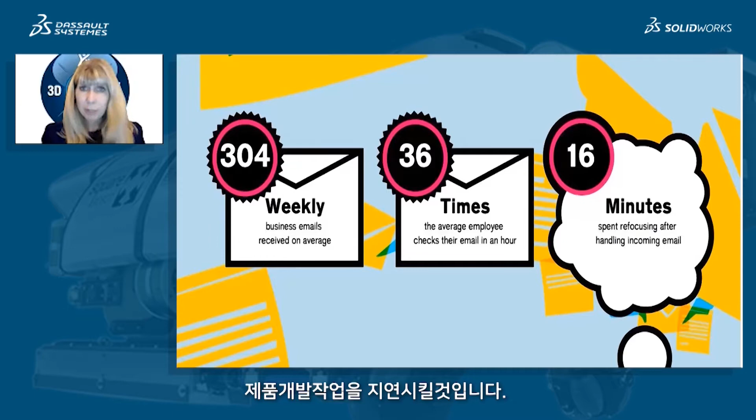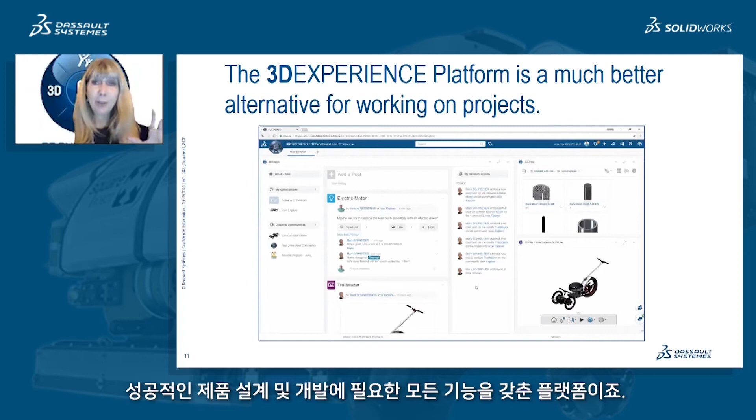It's very disruptive, and that's why we like to talk about the 3DExperience platform. It's a much better alternative for working on your projects. It's all inclusive—everything is in one place. Here you can work on SOLIDWORKS, collaborate with other people, get notifications, and see tasks you need to work on. It's really a one-stop shop for everything you need to be successful in product design and product development.

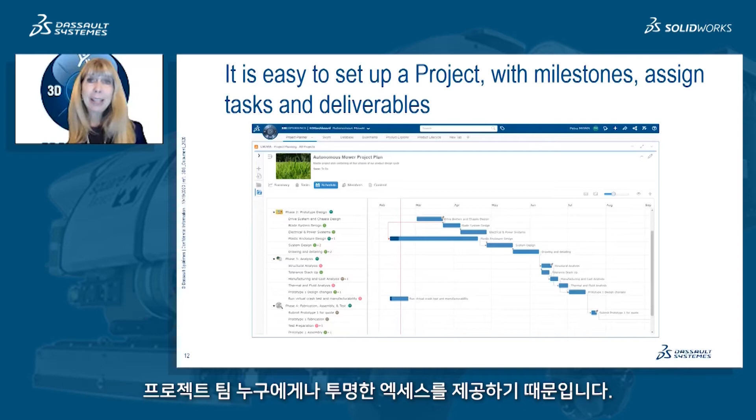You will also see that it's very simple for you to set up a project where you have milestones, tasks, and deliverables. There is a role called project planner where you simply go in and say, this is the project. You set up the different milestones along the way, you assign tasks, and it will help you keep track of everything. At any point in time, people can come in and check the timeline to see what's been accomplished and where you are, so there's transparent access for anybody on the project development team.

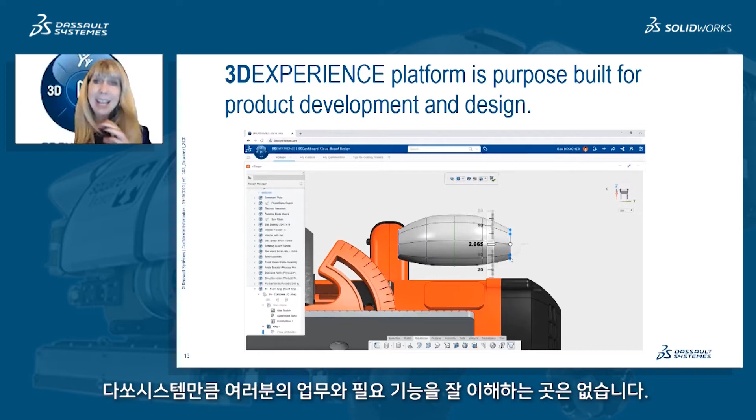The great thing about the 3D Experience platform is it was intentionally built for product development and design by the people who bring you SOLIDWORKS. They understand what you do. No one understands what you do like they do.

It's also very easy to create dashboards with very powerful metrics. We do it all the time at Dassault Systemes. One of the things I love is that we all use the 3D Experience platform, every single employee. We log on in the morning, we see if we have any notifications, we see if we have any tasks that we need to do. It's a great system for helping us collaborate and be very successful in projects.

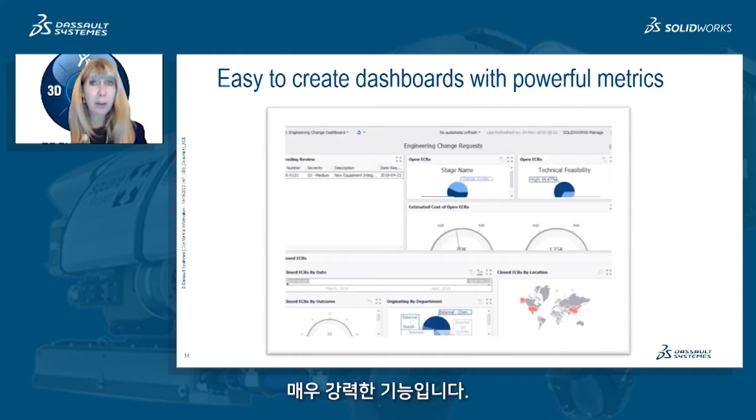Here's an example of where you could have a dashboard that shows you if you had any engineering change requests. You could grab all types of information from the internet, like sales, for example, and have it calculate where your sales are at any given time. It has the ability to bring in Excel spreadsheets and keep dynamic information up to date so that anybody can take a look at metrics and where you are at any point in the project life cycle. It's very powerful. You don't have to ask anybody else for the information. You can go look for yourself.

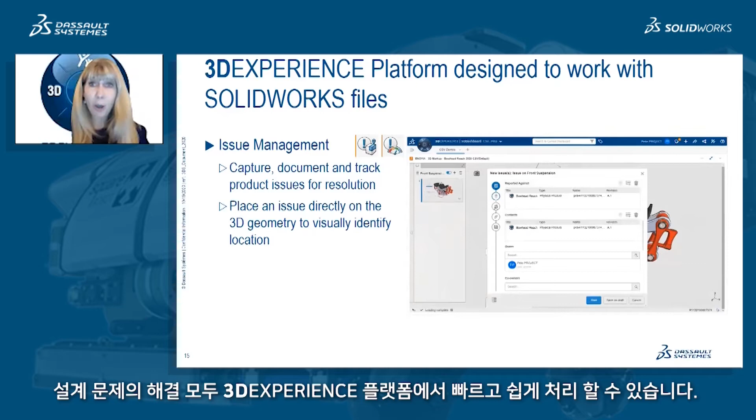The 3D Experience platform is also designed to work with SOLIDWORKS files right there in the platform. Things like issue management are very easy to do. It's easy to capture, to document, to track the product issues and the resolution, and you'll find that design challenges get solved faster as a result of the 3D Experience platform.

So just kind of a recap: there's transparent access for everybody who's a stakeholder. Anybody can take a look at where you are in a project. It's very easy to post your SOLIDWORKS data up there. You can review your tasks without leaving SOLIDWORKS, so you don't have that disruption you have with email. You can continue working and check in on tasks and see where you are without that big disruption. You get obvious, friendly task reminders, all the time at Dassault Systemes when we're working on projects, and it's just so much more efficient than email.

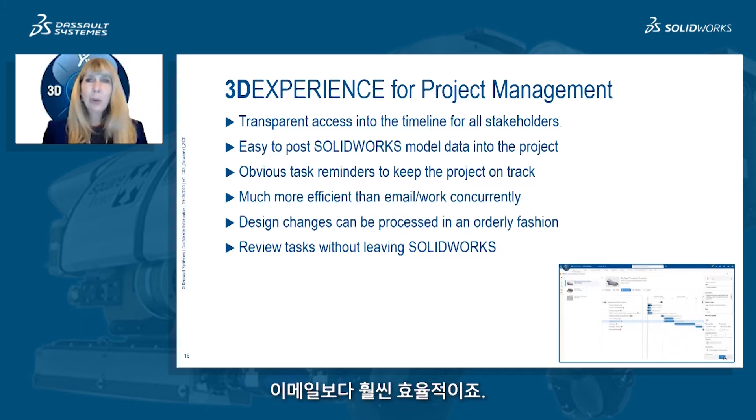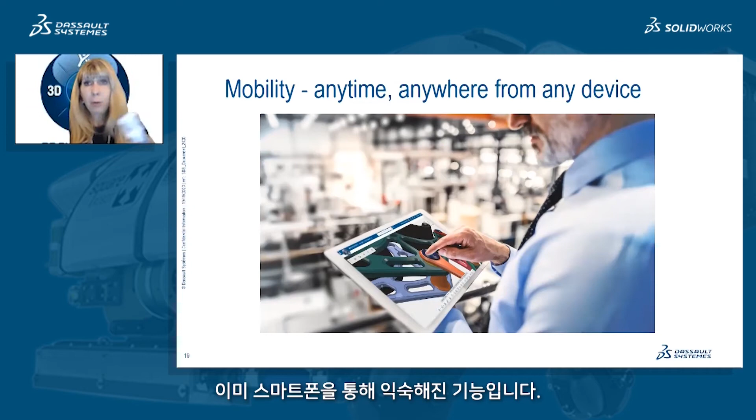Let's talk about mobility, the ability to access your data anytime, anywhere, from any device. We're very familiar with that with our smartphones. We understand this, and it's something that's very valuable to us.

A lot of us learned this when COVID hit and we were forced to work from home. Now, how many of you had problems working with SOLIDWORKS from home? Was your design data on your computer in the office? Was it stored in the cloud? Or was it a problem for you?

I'll be talking later about the 3D Experience SOLIDWORKS offers, but if everybody had been on that, it would have been no problem for anybody to continue to work on SOLIDWORKS. You don't have to worry about checking in your license and checking it out, it knows who you are. You can log on from anywhere and access SOLIDWORKS, as long as you've installed it on your local computer. And where's your data? It's in the cloud. You can get to it anytime, anywhere, from any device, which is very powerful.

Now I'm going to talk for just a second about a role called 3D Creator, and the product is actually called xDesign. You could call it either one, we'll know what you're talking about. This is CAD on the cloud.

Now I know you love your SOLIDWORKS, and we're not saying you shouldn't love your SOLIDWORKS, but if you ever decide you want a product that's completely on the cloud, this is what we're talking about. You could access it anytime, anywhere, on any device. It's very similar to SOLIDWORKS. There's a lot of similar functionality. Some of the tools are exactly the same, and you'll feel at home in no time.

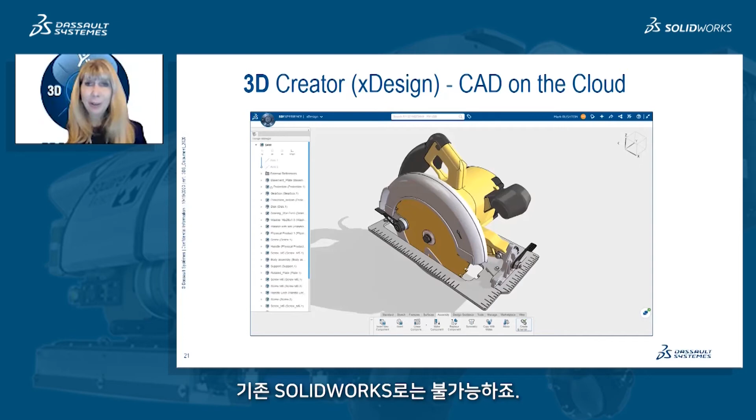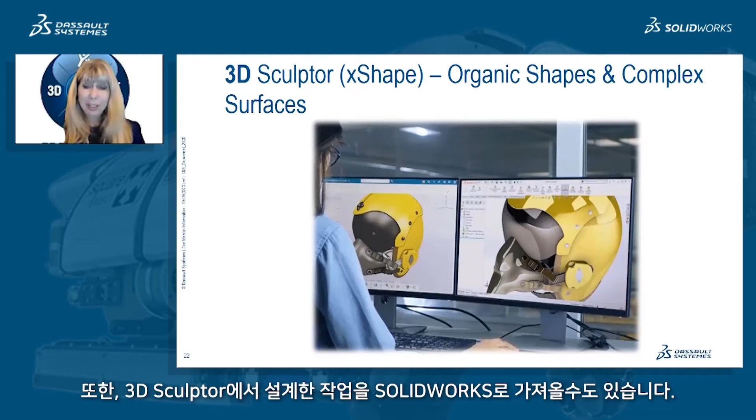Data management. This is where I think you're going to find the biggest excitement and the biggest power for you. So we've all experienced pain in data management with SOLIDWORKS, right? If you've been in a situation where you couldn't find a particular part, have you ever actually redrawn the part just because you couldn't find it? Or you spent more time looking for it, you could have redrawn it, right? Ever worked on a file or a part only to find out it wasn't the most recent version?

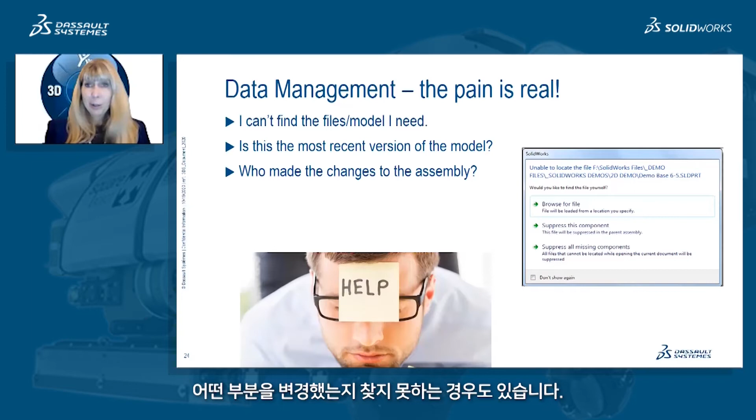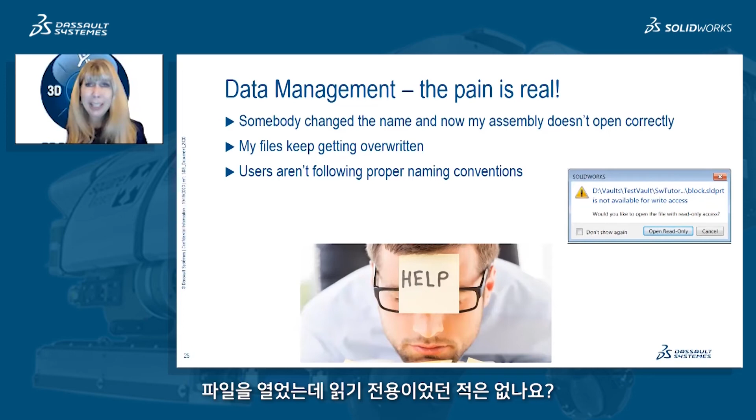That's very frustrating. And ever wondered who made some changes to an assembly or to a part and didn't know who did it or what happened in there? You want to be able to track back to see what changes were made and by who. A good data management program, you could do that. And maybe your files keep getting overwritten, or maybe people are not following naming conventions. These are all problems when you don't have a good data management system. Have you opened a file and it said it was read-only, access only? These are all frustrations that we've all run into.

You want to make it easy for people to access your design data, but you want to keep working in SOLIDWORKS, right? You want to make it easy on them, but you got to keep working. Or maybe you have some really large files, some large assemblies, and you need to send this to somebody, but when you do, not everything gets sent properly, right? It's a big reach. Usually some parts end up being missing, and then you lose control, right? Once you send it off, I don't know what's going to happen. You want more control and you want it to be easier. Maybe you've wanted to invest in data management, but you couldn't afford it because the servers were too expensive, or IT was going to be too complicated and too expensive. And of course, we all want our files to be safe and secure.

So data management in the cloud with the 3DEXPERIENCE platform, very, very powerful, absolutely safe and secure. It has the top credentials that you need to have trust in the fact that the data is secure. And the IT is either zero cost or very low cost, and the hardware cost, it's in the cloud. So you don't need to worry about what type of file server, you don't have to worry about what type of computer you have. You will always be working on the latest revision of a file. No worries there. You can track who has made changes to a part, to an assembly very easily.

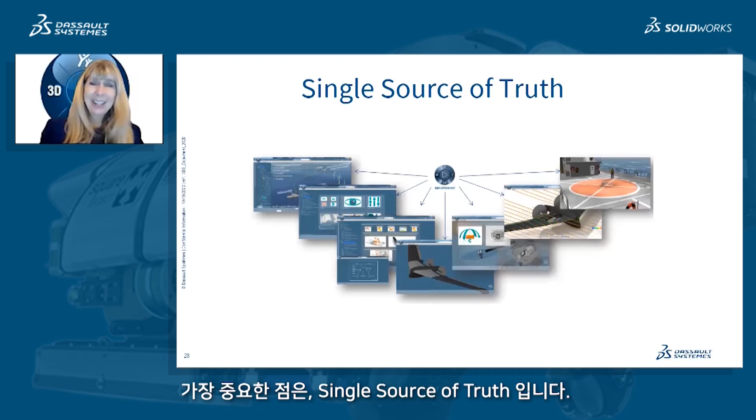And once again, when your data is in the cloud, you can access it from anywhere. You want to work from home, no problem. You want to work from the office, no problem. You want to work on the train, no problem. And I think the most important part is there's a single source of truth. You will always know that you are working on the right file, and that is very valuable.

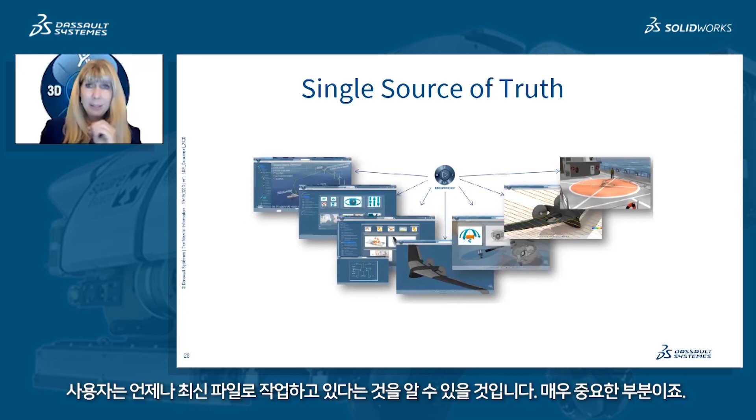Infinite computing. I did tell you this was my personal favorite because I do think this is the most powerful aspect of the cloud. Simulation in the cloud is a perfect example.

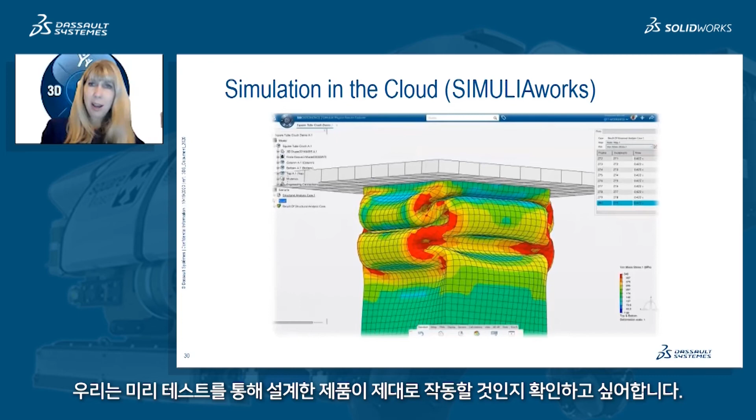Part of our brand is a great product called SIMULIAworks that is simulation in the cloud. Simulation is something that can take hours to do properly, but in the cloud that is not the case. You want to test your products, make sure they're going to function, make sure they're quality products. You can do that easily with SIMULIAworks. There are all different types of testing you can do with SOLIDWORKS in the cloud in a very short period of time. And if you knew it wasn't going to take a lot of time, you would do a lot more testing and end up with a lot better products.

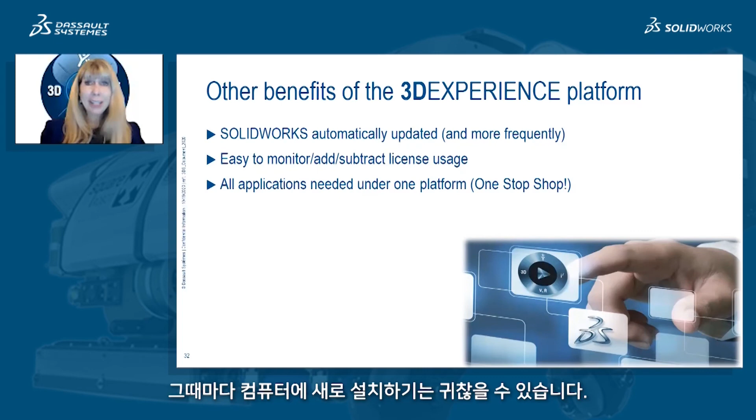Some other benefits: we love it when a new release of SOLIDWORKS comes out, but we don't like to install it on all the computers. You'll find there are more frequent updates that are very lightweight, and you'll barely even notice that your software is being updated. So you get access to new features throughout the year instead of all at one time. That's a great feature.

And if you've ever had issues trying to figure out how many licenses you have and what release or version you have, not a problem at all with the 3DEXPERIENCE platform. It's very easy to add or subtract licenses. Maybe you don't need as many licenses as you thought. Ultimately, I think you'll find that will save you some money.

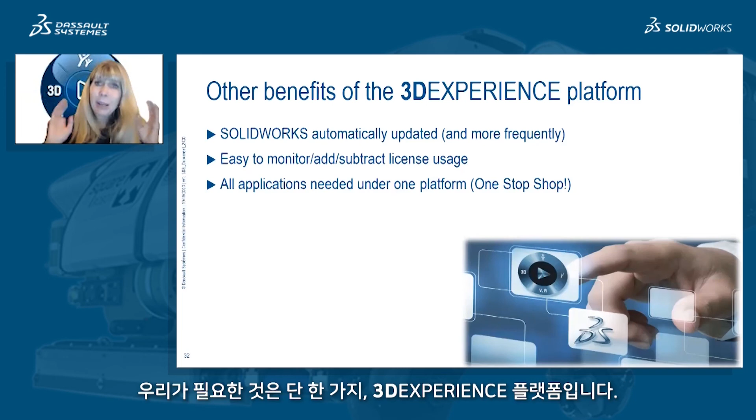And then I like to say that all the applications are under one platform. It's a one-stop shop. I don't need Dropbox and my email and Slack or Microsoft Teams or all these different platforms, all these different products. I just need one platform, the 3DEXPERIENCE platform.

So let's take a look at the 3DEXPERIENCE SOLIDWORKS offers. And these are great offers. First of all, the prices are amazing. In some cases, they're basically the same prices if you just were to purchase SOLIDWORKS alone. That's one of the reasons I love this. Please note, they all come with SOLIDWORKS.

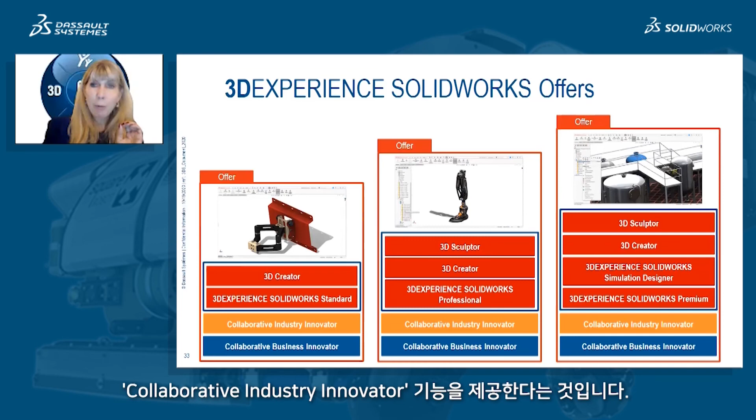They all come with the SOLIDWORKS that you install on your desktop. In addition, they all come with Collaborative Business Innovator and Collaborative Industry Innovator. You're like, what is that, Lynn? You didn't talk about that at all. I did — those are all the collaboration tools I talked about, the data management tools I talked about, and most of the project management tools I talked about. I just didn't label them. You don't need to know, you just need to know that you get all that great stuff. So you get all the power of the 3DEXPERIENCE platform.

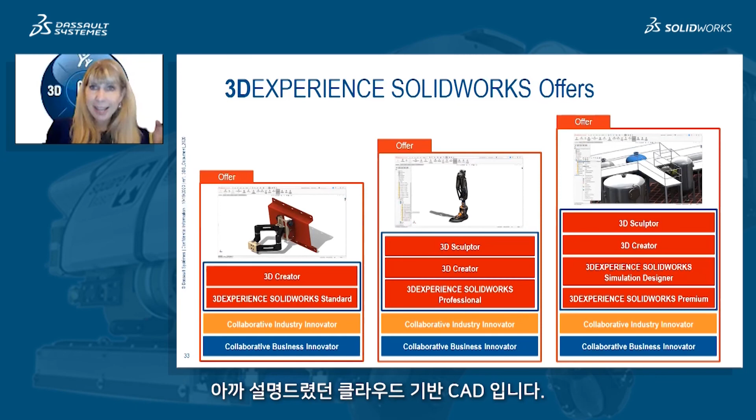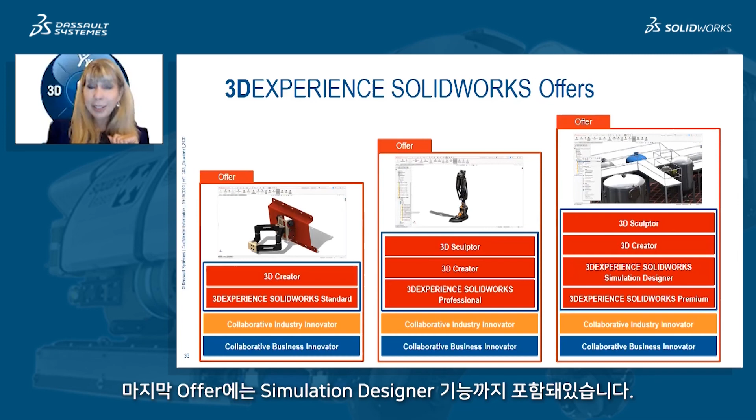In addition, you'll see the first offer gives you 3D Creator — remember, CAD in the cloud. The second one also gives you 3D Sculptor, that sub-D surface modeler in the cloud. And the last one also gives you Simulation Designer. Now, I'd like to tell you that's in the cloud, but it is not — it is a simulation for your desktop, not simulation in the cloud, but still fabulous. So those are the three offers.

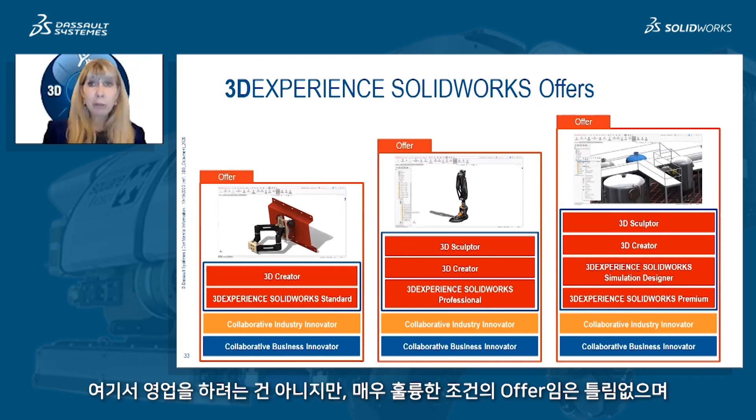Ask about them, the pricing is amazing. I know I don't like to sound salesy, but these are three great deals that allow you to take your SOLIDWORKS to that next level, which is so, so important. Let's kick it up, take it where it needs to go next.

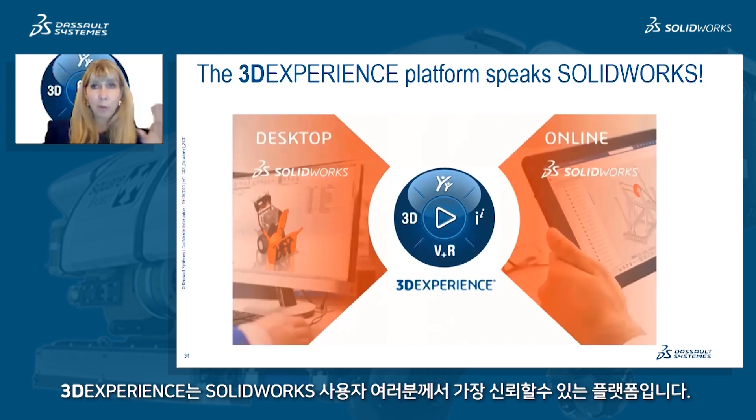As I mentioned, the 3DEXPERIENCE platform speaks SOLIDWORKS. Slack doesn't speak SOLIDWORKS, Microsoft Teams doesn't speak SOLIDWORKS, Dropbox doesn't speak SOLIDWORKS. You can't trust your data with anything except the 3DEXPERIENCE platform.

I always like to end my presentations with this phrase, because everything I talked about requires some change. But I believe that the most dangerous phrase in the language is, we've always done it this way. What if you made some changes? What if you embraced the 3DEXPERIENCE platform and found it was so much better? What if your everyday life was so much better? I believe it would be.